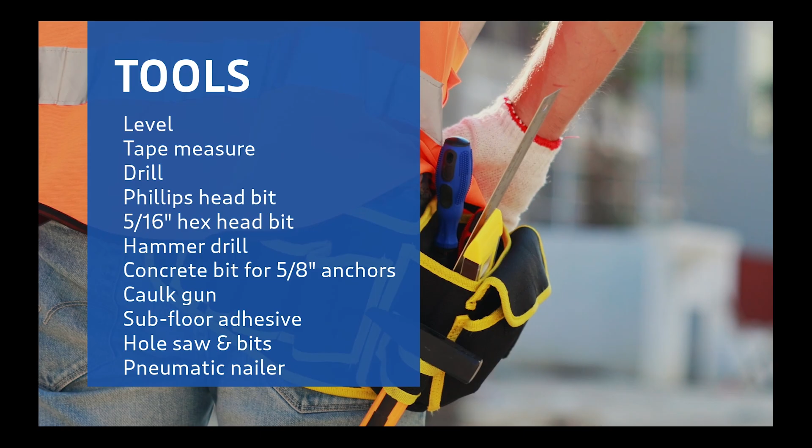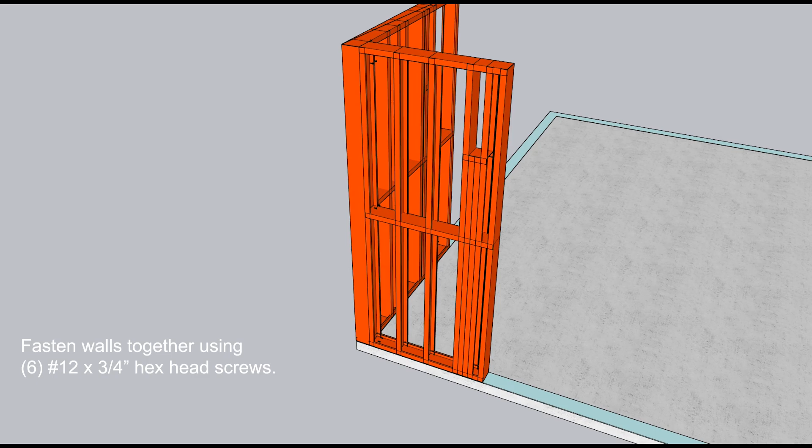The house in this example is built on a slab foundation. Begin by placing foam seal between the concrete slab and the exterior 5.5 inch walls. Walls should begin at a 90-degree corner. Attach wall panels together using 6 No. 12 by 3/4 inch hex head screws, 2 in the bottom, middle, and top of each connection. Continue adding wall panels in this fashion until you have completed all exterior and interior walls according to the plan provided.

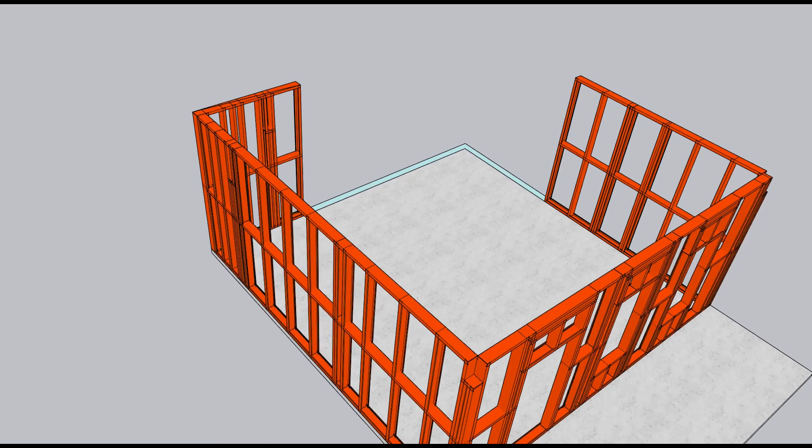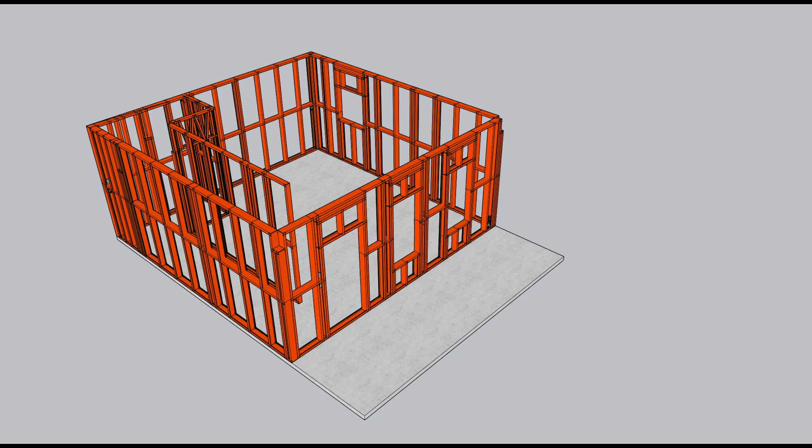Anchor exterior walls to the concrete using the provided Simpson HTT4 and 5/8 inch Titan anchors. Anchor placements can be found on the hold-down plan. Attach to the wall by filling in all the holes with No. 12 by 3/4 inch hex head screws. When adding posts, use the provided Simpson BC60 post-base brackets and 5/8 inch Simpson Titan anchors. Posts will need to be cut to size based on the amount of slope in your concrete. Porch beams are attached to the posts using provided RCA brackets and No. 12 by 3/4 inch truss head screws.

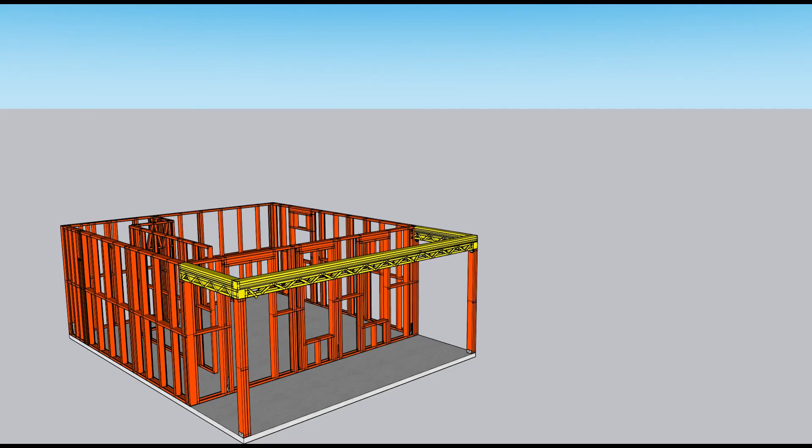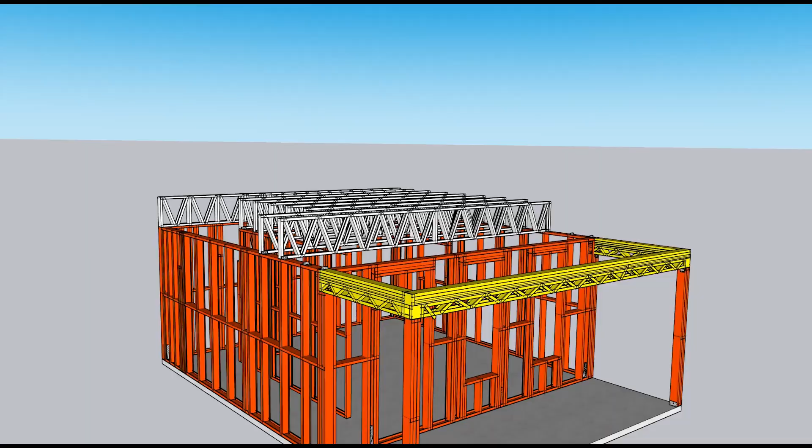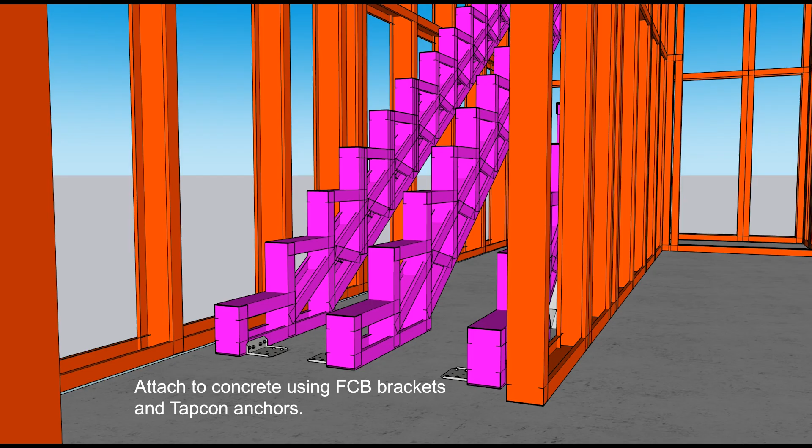Floor joists are then secured to the load-bearing walls using FCB brackets and 8 No. 12 by 3/4 inch hex head screws. Here we are adding beams to support the stairs and landing. Outside risers will have scabs attached to them to allow for drywall and trim. Be sure to place the scab side toward the walls. Then attach the stairs to the concrete using Tapcons or similar concrete anchors. Secure the upper section to beams or joists using 4 No. 12 by 3/4 inch hex head screws.

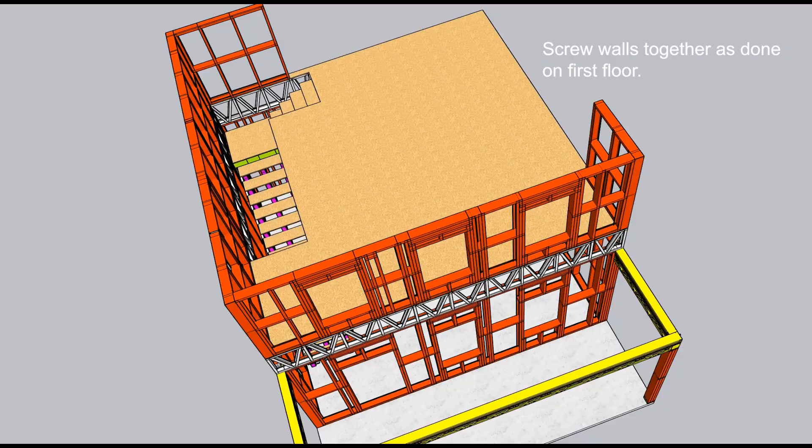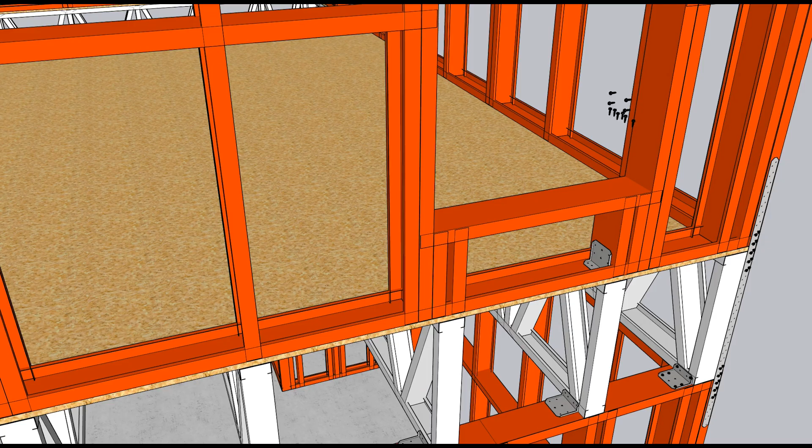Next, attach the subfloor using adhesive that works on wood and metal. Then screw or nail the subfloor to the floor joist using a pneumatic nailer. Continue adding the second-story walls using the same method as the first floor. Second story and first story walls are anchored to the floor joists using Simpson MSTA 49 strap ties. Secure them with 10 No. 12 by 3/4 inch truss head screws on each end. Refer to your hold-down plan for additional attachment locations and attach using FCB brackets and No. 12 by 3/4 inch screws on the vertical flange going into the stud, and No. 12 by 2 inch screws on the horizontal flange going through the subfloor and the top of the floor truss.

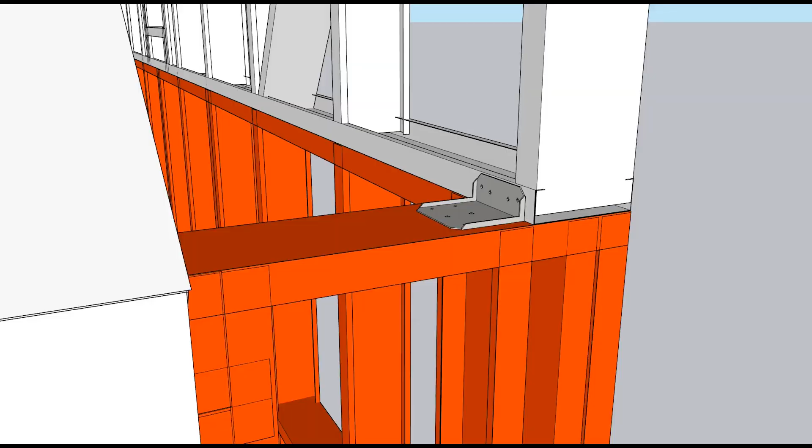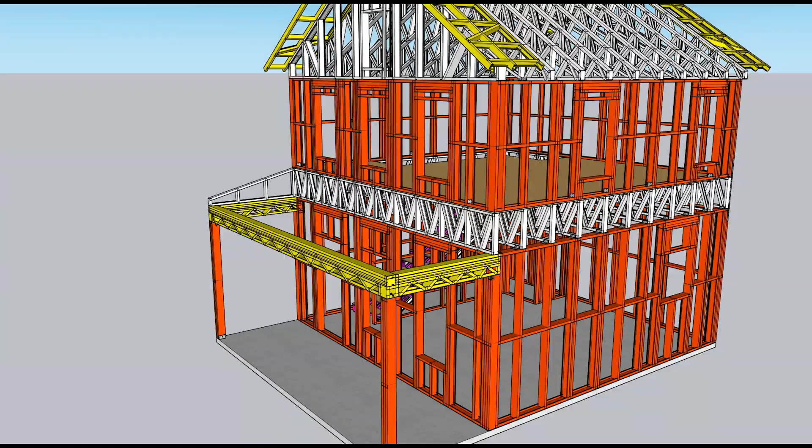Lay out trusses according to your plans. Trusses are secured with FCB brackets and No. 12 by 3/4 inch hex head screws. Overhang panels are installed on top of the gable trusses and to the sides of the first common truss using No. 12 by 3/4 inch hex head screws. Ensure to screw into both trusses. Porch trusses are then secured to beams using FCB brackets and No. 12 by 3/4 inch hex head screws.

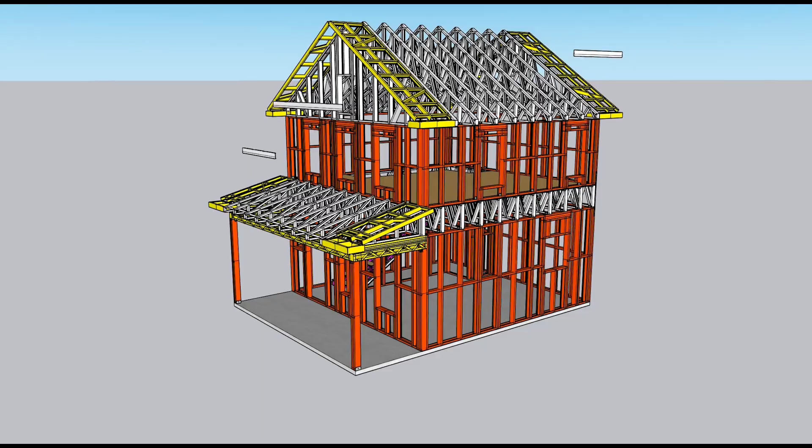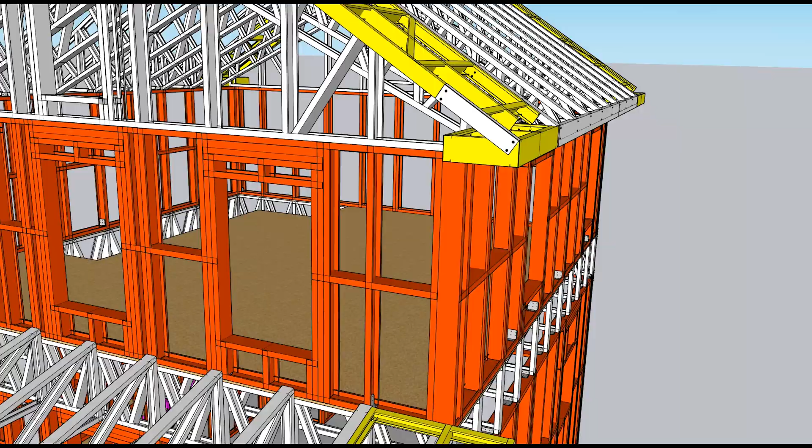Attach bird boxes to the front of the first common truss and to the end of the gable truss using No. 12 by 3/4 inch hex head screws. Notched fascia supports are cut to size and added to the eave side of the home. Install provided bird box caps to finish the gap between the gable frames and the bird box panels. This house is now ready for sheeting.

Strong and lightweight, fast frame structures from JD Metals meet the demand to build fast and accurate. Fast frame is the building method of the future, and the future is today.